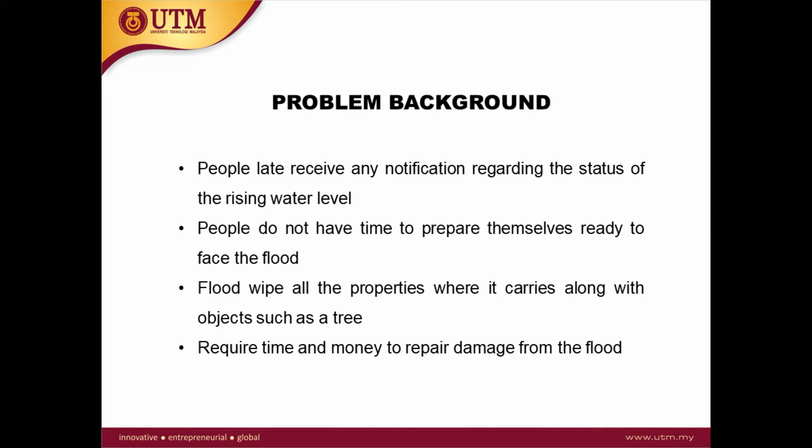Last but not least, for the problem background, people require time and money to repair the damage from the flood. Okay, we move to the next slide, which is the project aim. The aim of this project is to develop a system which has the capability to give an alert regarding the possibility of a flood occurring based on the rate of rainfall, as well as monitor the water level.

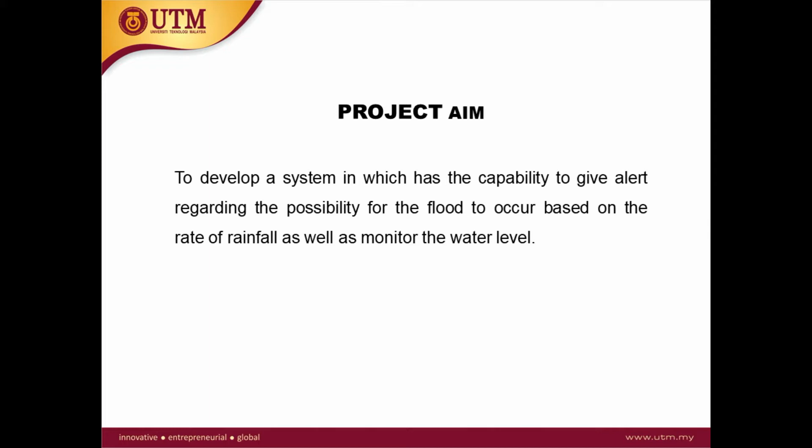Okay, next we move to the project objectives. The first objective of this project is to analyze and study the existing approaches on flood detection against the developed project. Second is to design and develop the proposed detection of water level with respect to time to predict the possibility of a flood occurring based on rainfall. Last but not least, to evaluate the functionalities of the developed system in terms of its capability to detect the water level and give alerts.

Next, we move to the project scope of this system. This system will focus on monitoring the water level to measure the rising of water. The system will collect data from the sensor and make a prediction on the possibility of a flood occurring. The system will give an indicator of the danger level, such as green, yellow, red, based on the current situation.

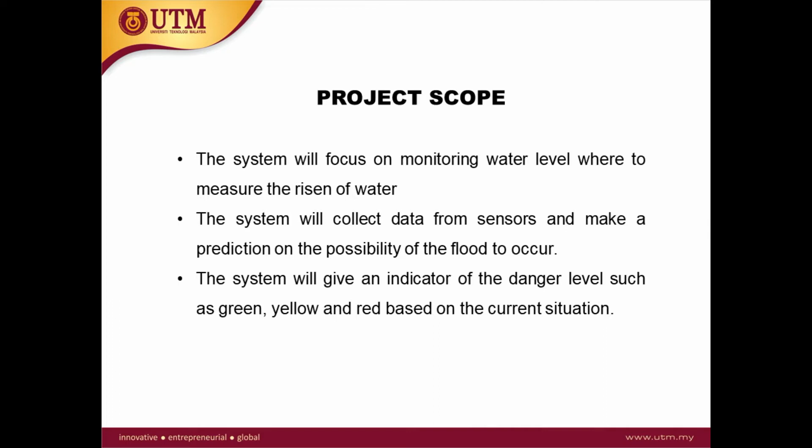Okay, now we move to chapter 2, which is the literature review. This slide shows the comparison between the existing systems and the proposed system. As you can see, the first system, early flood detection using mobile network, does not have two things: an LED to indicate the water level and a mobile application. The second system, flood monitoring and early warning using ultrasonic sensor, only has the characteristics of internet and alarm, or in other words, warning.

Okay, the third existing system, water management and hydrology management division, is the same as the first system: it does not have an LED or a mobile application. So I came up with this idea to propose flood prediction and detection based on rainfall using NodeMCU, which provides all the features: LED, rainfall data analysis, mobile application, internet, and alarm or warning features.

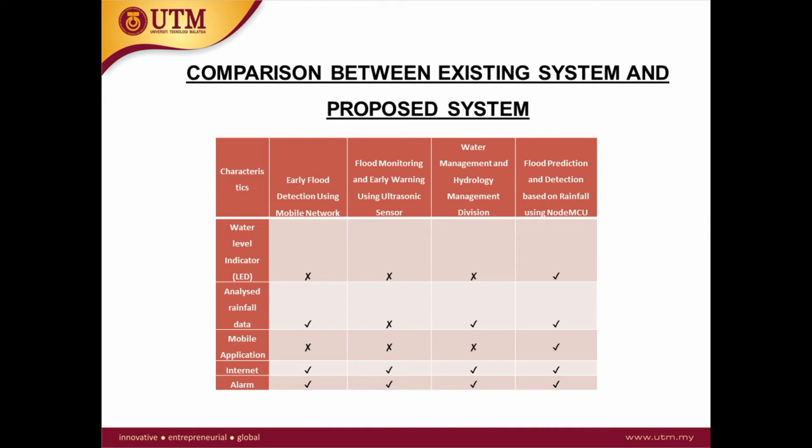Okay, we move to chapter 3, which is the system development methodology. The methodology chosen for this project is the agile model. The agile model consists of five major phases: planning, analysis, design, implementation, and testing.

In the planning phase, identify the problems faced by the existing system. Next, determine the project objectives, project scope, and technology to be used for the development. Next, in the analysis phase, analyze important information such as software that can be used for the development, and identify the system requirements of the project. Next, in the design phase, design the planned system interface, proposed application interface, internal and external requirements, and all processes that occur within the system.

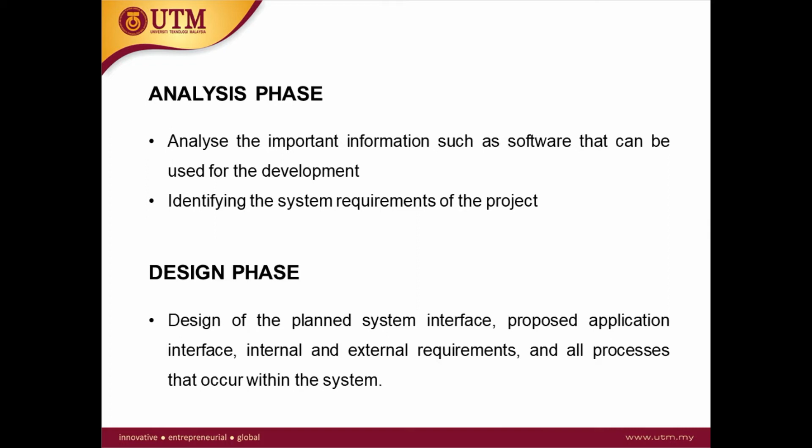Next, the implementation phase: ensure all the components planned in development are implemented successfully. Lastly, the testing phase, in which we identify and test whether the developed system and application are properly developed, checking whether the system meets both user and system requirements.

Next, we go to software requirements, which is all the software used throughout this development: Android Studio for application development, Android SDK, Firebase to store the database for the P-Flood app, draw.io for the planning phase mentioned earlier, and Blynk and Arduino IDE to program all the sensors used in this project. Next, we move to hardware requirements.

We move to chapter 4, which is requirement analysis and design. Next slide, we demonstrate the overall P-Flood system, the use case of the P-Flood system, in which there are two actors or roles in this system: one indicates the user and the other indicates the admin.

User is expected to experience four features, in which they are able to view the list of authorities, receive warning notifications, view the status of current water level, and view the prediction of flood.

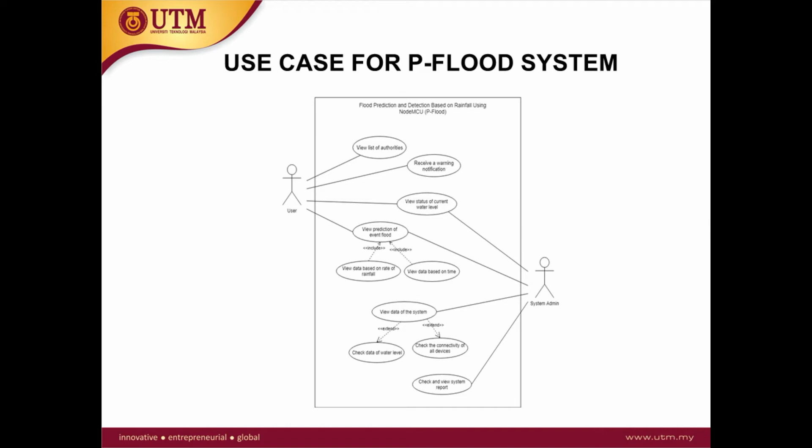For the system admin, they can do the same as the user, viewing the status of water level and the prediction of flood. But the admin is slightly different from the user, in which the admin is able to view the data of the system and check and view the system report.

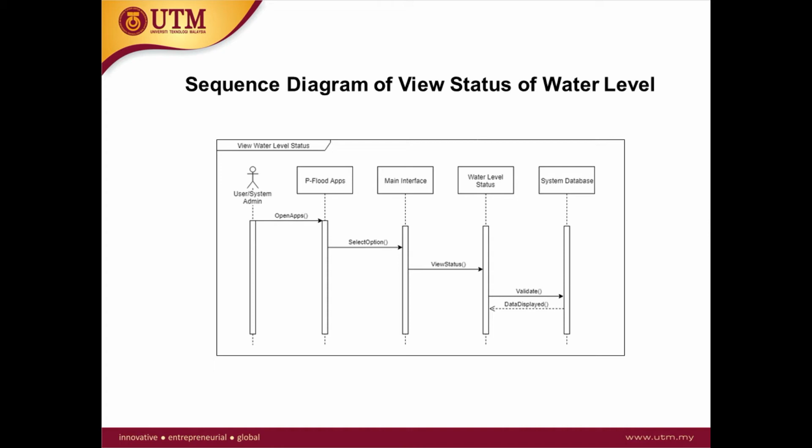Next we move to the sequence diagram of view status of water level. Then the next slide demonstrates the sequence diagram of prediction of flood event.

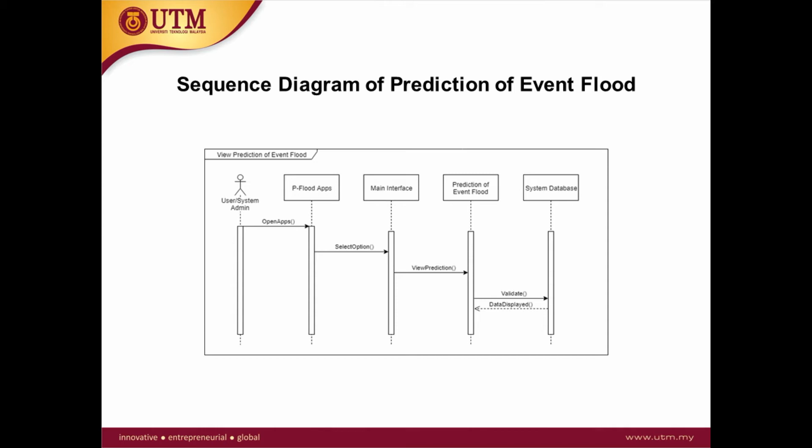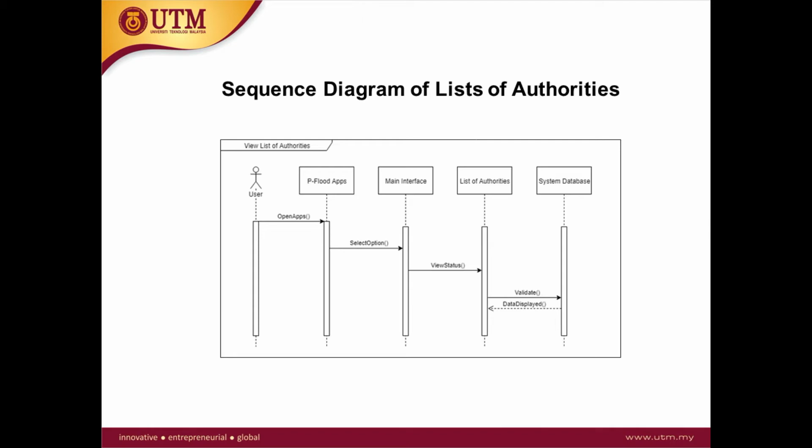Next slide will show the sequence diagram of list of authorities. In the next slide will show the sequence diagram of warning notification.

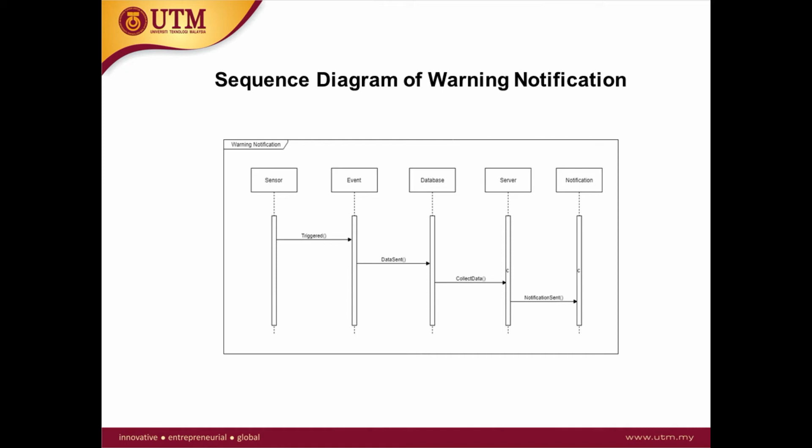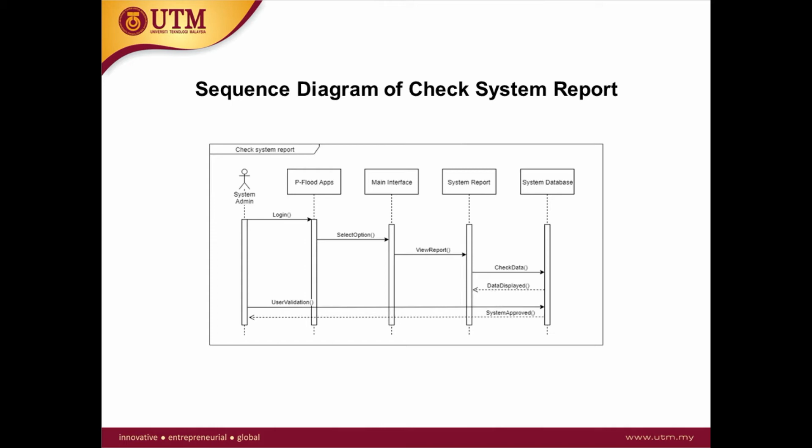Next slide shows the sequence diagram of check system report, this is for the admin role. And then the next slide will show the sequence diagram of check system data, this one also for the admin role.

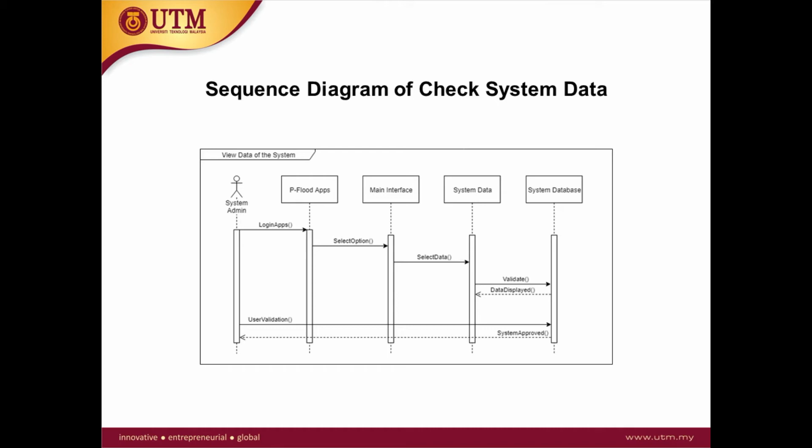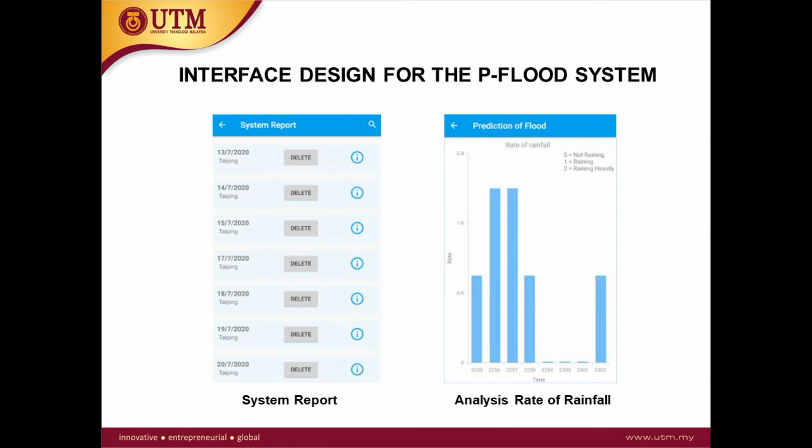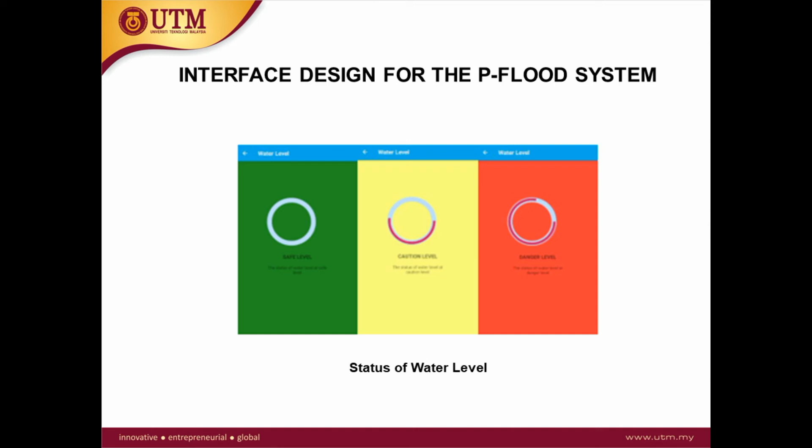Next, we move to chapter 5, the implementation and testing.

The next slide will explain or demonstrate the hardware testing, in which the rain sensor is being tested to detect water, giving data to the LCD on whether there is rain or not.